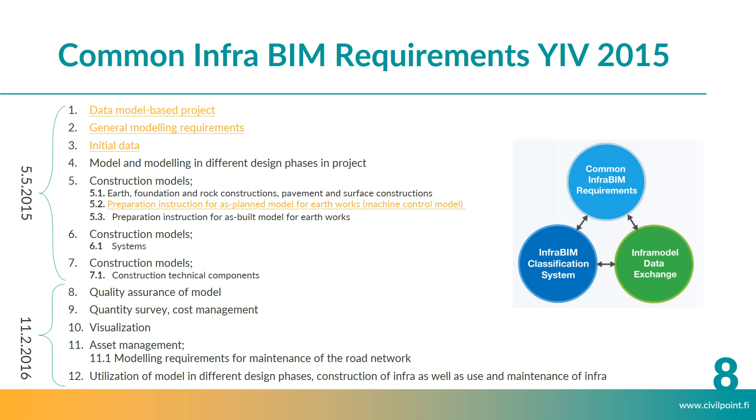Everybody should see in real time the same information that is available in the model, exactly at the time when the user is looking at the model. This will not, of course...

Lots of people still use 2D drawings. These are the official deliverable, at least in many cases, at least still in Finland. But we're trying to move into a kind of paperless data flow in which everything would be model based.

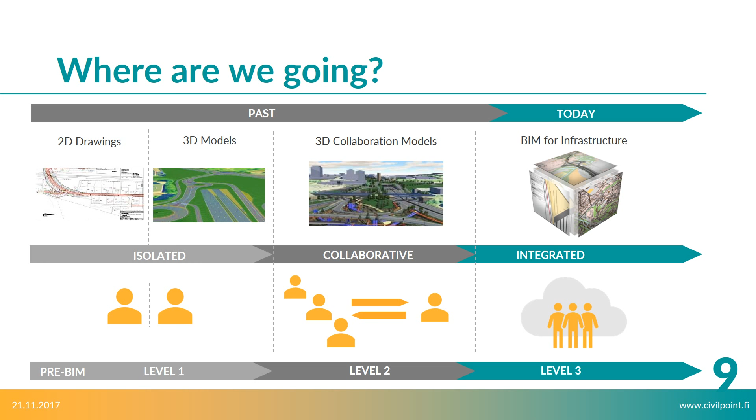As said, the customer, the Finnish Transport Agency, and the other big owners, big cities and municipalities, they have a demand for modeling. This is the most important thing about being able to use BIM in infrastructure. You need the big owners ordering BIM-based solutions in order to be able to design more effectively.

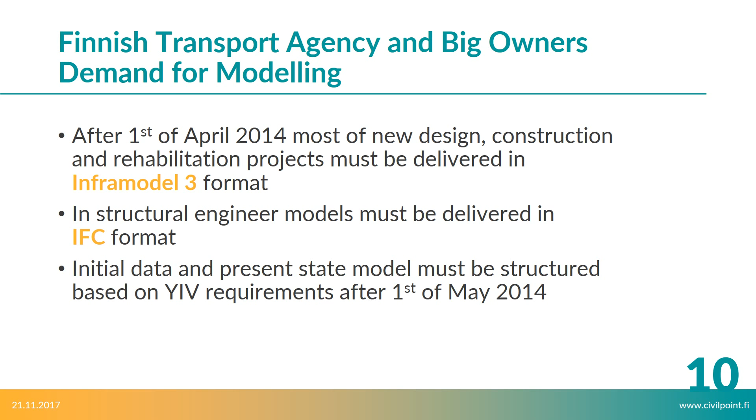Since the 1st of April 2014, everything is required to be delivered within the Inframodel 3 format. For the infra part and structural engineering, the format of the deliverance is IFC. All of these requirements are updating constantly. For example, now we're working with the Inframodel 4 version of the standard, which will be used starting from spring 2018. This is the way these demands are moving on in Finland.

Okay, a few lessons learned from Finland and abroad. If we take a look at BIM in the project lifecycle, it's very interesting to see...

There are a lot of different aspects with regard to when the design process is started with conceptual planning, then moving into more detailed planning, construction, and eventually maintenance. There are different aspects in all of these cases, but the idea is having the information richer as it goes beyond one phase and towards the next, so that no data is lost during the lifecycle.

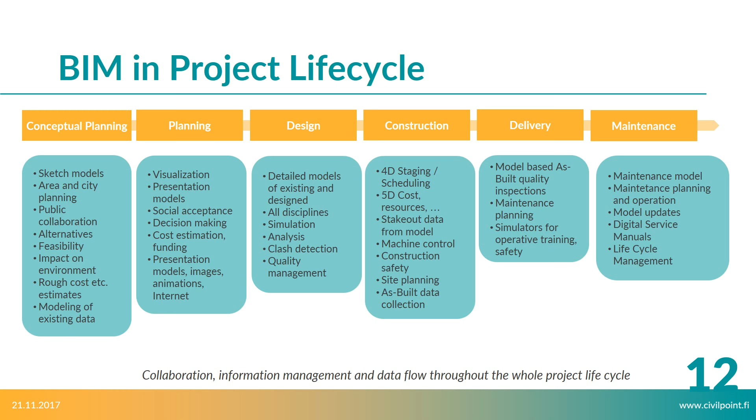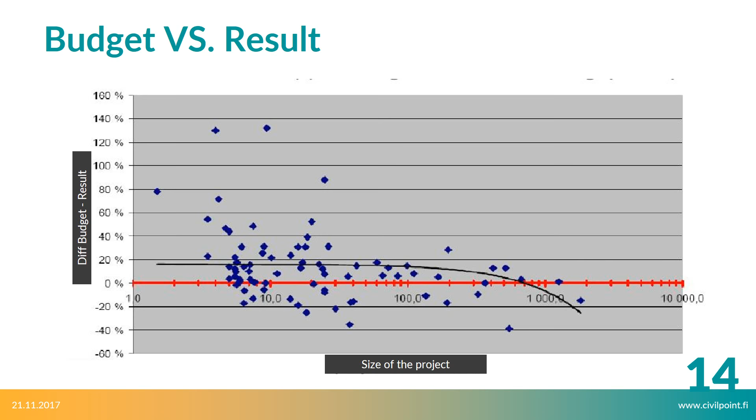Sharing best practices, mainly from the process point of view, is very important. There are different aspects if you compare the customer side, the designer side, and the owner side.

These things are developing constantly. As said, the requirements and standards are developing all the time. The modeling has to be a part of the design, not a separate phase of its own, and that's why all of the different domain design disciplines' software is also going in that direction. The user should always be able to look at the modeled view from the project, not separately create something that will then produce the result of the modeling.

When sharing practices from the modeling point of view, modeling should be started at the very beginning of the project and continue up until the end. Different benefits can be found along the way, maybe some that cannot be seen beforehand, but when everybody is viewing and seeing the same model, these benefits become more clear to all of the parties using the same model to view the process and the design.

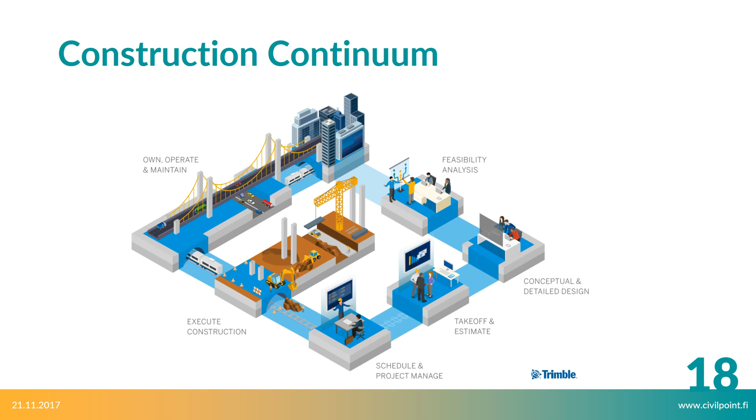Okay, that was about the slides. Then we'll be going to... I will show you a couple of examples about the software. I'll be moving into

NovaPoint base. As said, during the construction continuum, the data is really the most important thing to handle. And on Trimble solution, we have the Trimble Quadri data model server.

This is the NovaPoint base, which actually has now the view into the data that is located on the data model server. The data model server is a cloud-based service, an Oracle database, which will then handle all of the data and then show the information through this base user interface to all of the participants that are working in the project.

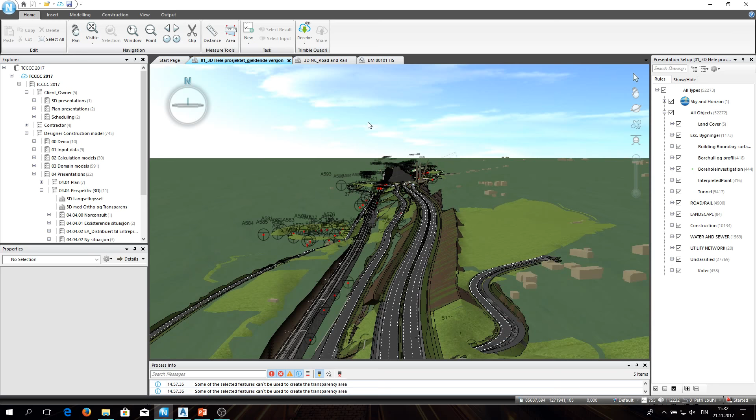This project in question is E6, a little bit northbound of Oslo, an actual project which is now, I guess, on the construction phase. This is a kind of a demonstration model about the different disciplines that are used to create this data set. I'll be showing you a couple of ready-made presentations.

This is also to do with the different requirements. This is a bit different compared to different market areas in Finland, for example, with regard to these common infra BIM requirements. There are certain kinds of process models that our users try to follow when adding different things on the model

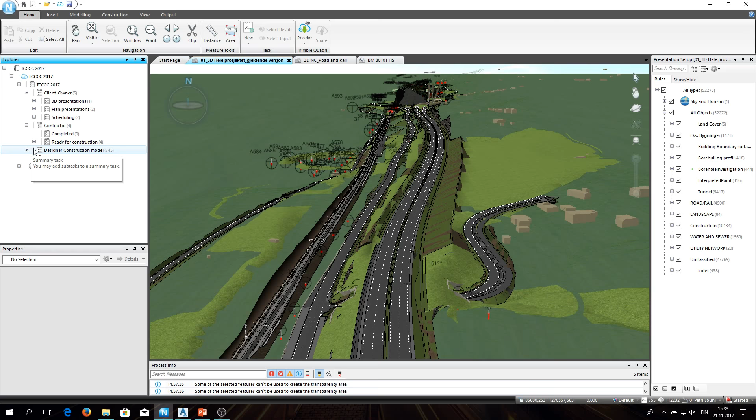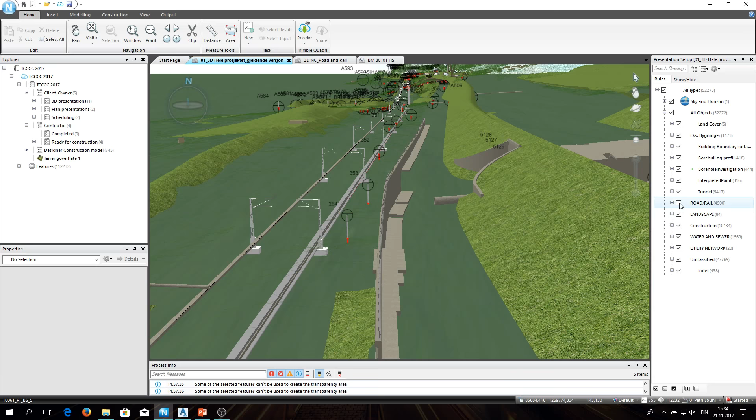with different tools. Then we have the view area in here, and also different presentation setup, meaning that I can disconnect and connect different parts of the model in order to see, for example, what's happening underneath the road and rail plan, in order to see more clearly, or then I can just create additional views that I want to see in the project.

Okay, everybody who's using the same data set will download one set of the data, which is called a work set. Everything that is now seen here is real time.

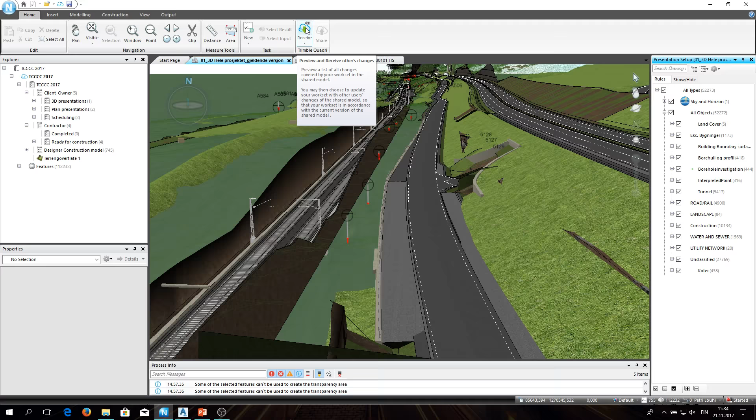If I want to update my work set, I can do it from here. Then I can see everything that is changed from the data model server, and then update all of the information, so I can be sure that I'm also always working and seeing the latest information about what other users have

been creating. In this case, the construction model is separated into client and owner, contractor, and the actual part where you can see all of the design.

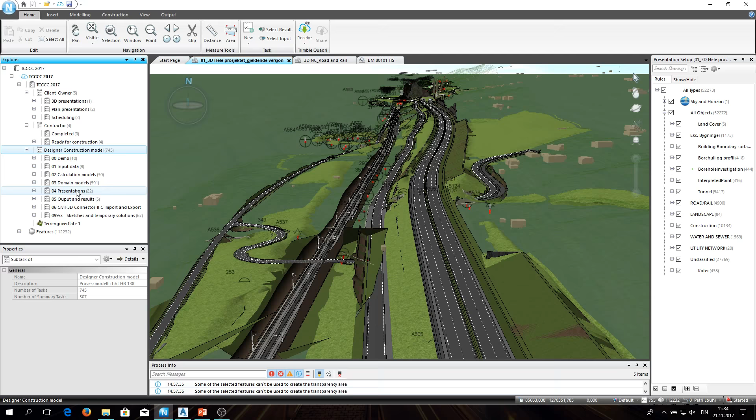And now if we are going to look at the railway design, we can see that, okay, we have two tracks in here which has been then added into the domain models part, and domain model rail will contain all the information about the railway design in this model.

This process model is of course totally user or organization definable, to be able just to structure the information so that it's easier to view and see in the model.

The railway design, if we think about Trimble solutions, the railway design, you can see different tasks in here which are then created in order to do the design required in this case.

Railway design has basically two main things: the alignment design and then the actual railway modeling, from which we can see the examples in here.

With regard to catenary design, there is also functionality that user can find the correct location for the catenary masts, and also the overhead lines and the bracing wires with regard to the electrification of the track.

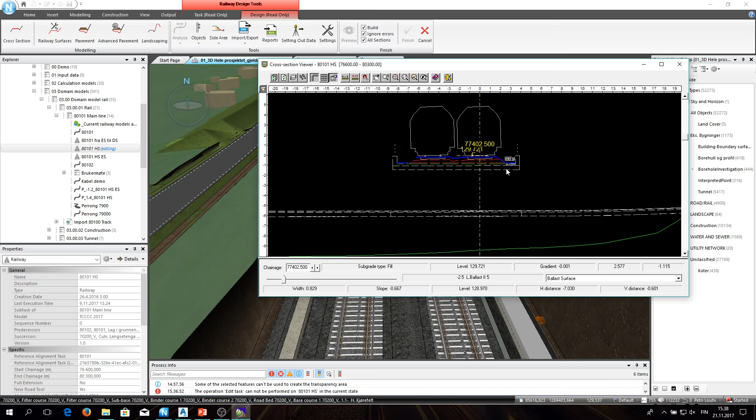Model consists of different surfaces. User can also model the clearance of the track that can be seen here, and also other parts of the model, for example, with regard to the structures that can be viewed within the design. All of these things are something that are affecting the design, so these need to be available also for the user.

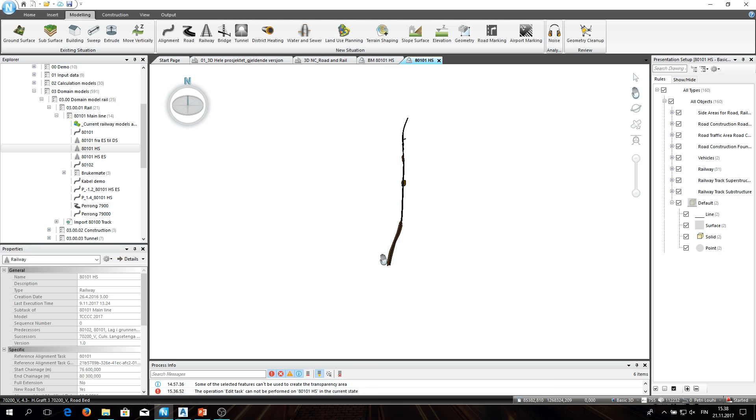As said, the model can be viewed in cross section, or if I want to view only that part of the model, only one track, I can select that to be seen in just 3D view. So now the model looks like this. Railway alignment design.

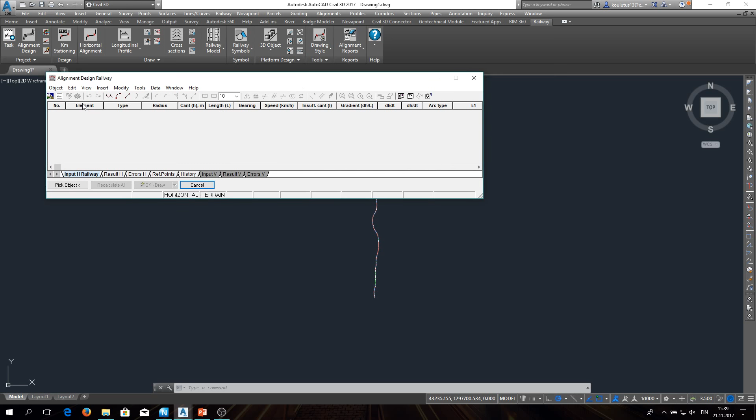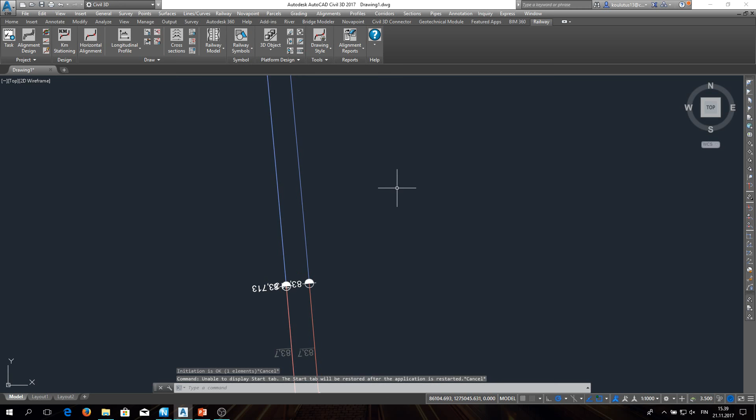What is done before the actual modeling of the tracks is done on AutoCAD side. We can use some tools that are used in railway design, and the alignment design tool is something that will be used on top of AutoCAD. We can use different options in alignment design, and then this information from the alignment design will be saved to the model in which the railway modeling is then done.

Also, if the railway modeling is not done in NovaPoint but in some other software, the user can use different methods of getting information into the model. On the import files part, there are different options to input more data into the project. For example, if LandXML surfaces or something is created on top of the drawing files, all of this information can be added into the project and seen like other elements added directly with the different discipline design solutions done inside the base system.

So when something has been added into the model, it can be shared back to the data model server, and then anybody using this project can update their own workset by the receive command and get the same information available also to their own worksets.

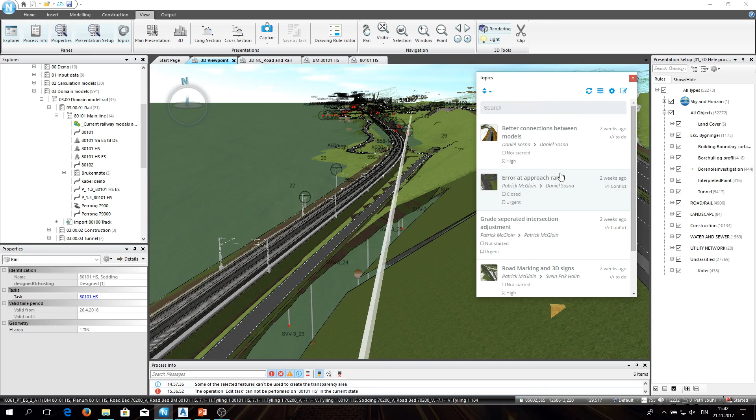In order, for example, to see maybe some errors in the model, and then change the status of different things discussed over the topics in the model. That's very powerful, to be able to have a discussion around the things included in the model, and use that as a kind of work list to get things corrected, because the model is real time.

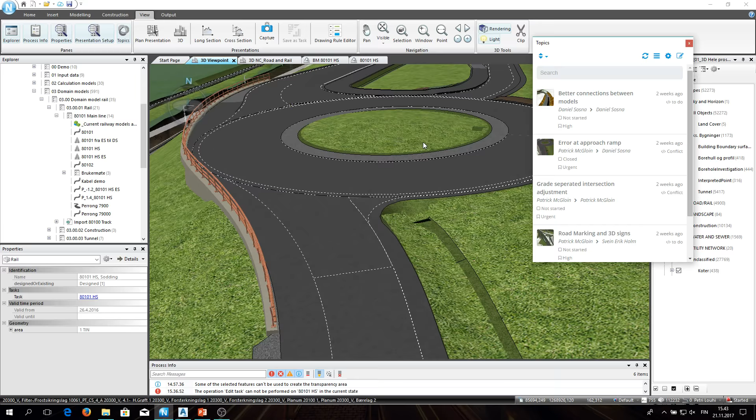Everything that is done and shared to the model will be visible also for all of the users that are available in the model.

Also, if a user is not using the base system, there are a couple of other ways of being able to use the software. One way is to use the NovaPoint Viewer, an application that can be installed next to the base system, which is only a viewer where you can view the data but not edit anything. The other option is to just use a web browser.

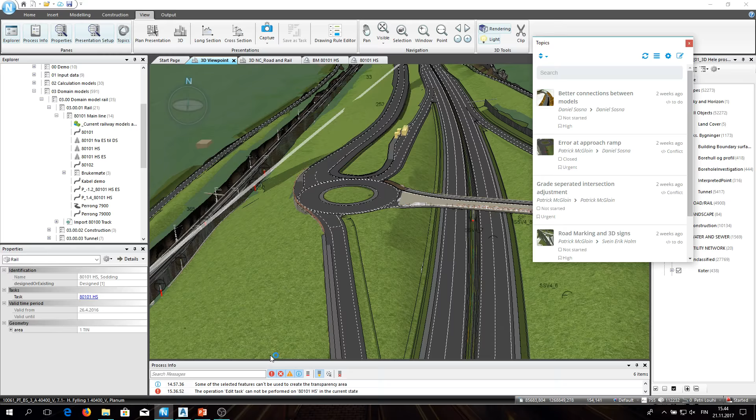For example, if I just log in, after Firefox has been installed with the latest update, I can go into the web browser and log in, and now I can go into the web browser and see the same dataset also over the website.

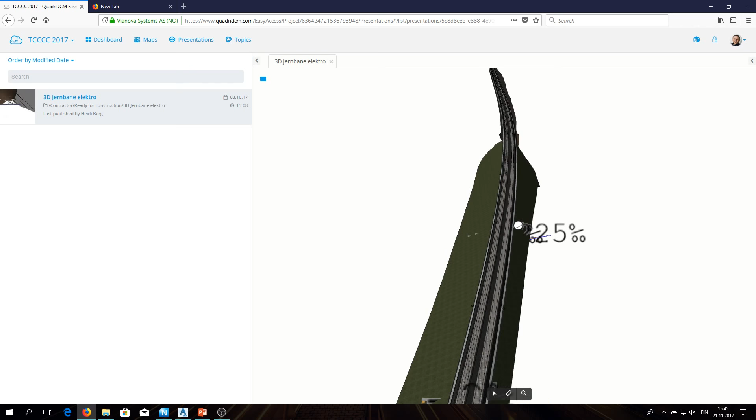So I can now see what has been happening in the project. I can see the project location, and also see the same topics and discussion here in the web browser. This means every presentation, also the 3D views shared into the model, can be seen by someone without them having to install actual software, in order to see different presentations used in the model, for example to participate in the discussion happening inside the model.